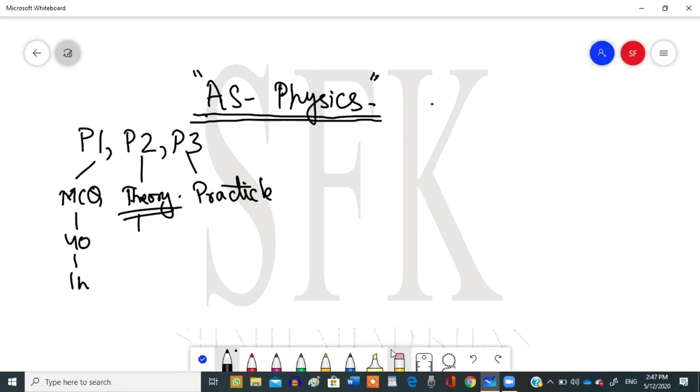I'm assuming you guys know what this is, right? You guys are familiar with all this stuff. Yes, sir. Okay, now going on to the topic. And by the way, you guys also know that P2 has a greater weightage than both the other components, the P1 and the P3. And P1 and P3 have equal weightage. So let's get started.

So the topic that we are going to cover today is moments. I'm not starting from chapter 1. We will do chapter 1, but later on. I'm doing the better chapter today, because chapter 1 is pretty basic. We can do that anytime.

Moments now. By definition, what is moments? Moments is the turning effect of force. And this is something you've done in O-levels as well. The turning effect of force is called moments. And if the examiner asks you to define what a moment is, this is not enough for the definition. You have to define it mathematically.

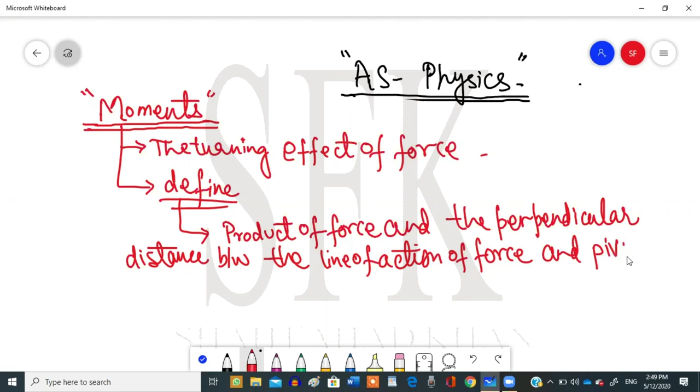You have to write it as the product of force and the perpendicular distance between the line of action of force and the pivot. I'll explain what this means.

Basically, if I have a log over here, a wooden piece of wood, a stick, and it's fixed from one end such that it is freely movable. It can rotate clockwise or anti-clockwise about this fixed pivot. This is called a pivot. Now if I apply a force over here at this particular point, this arrow, this dotted line, is representing the line of action of force, because this is the point where the force is acting.

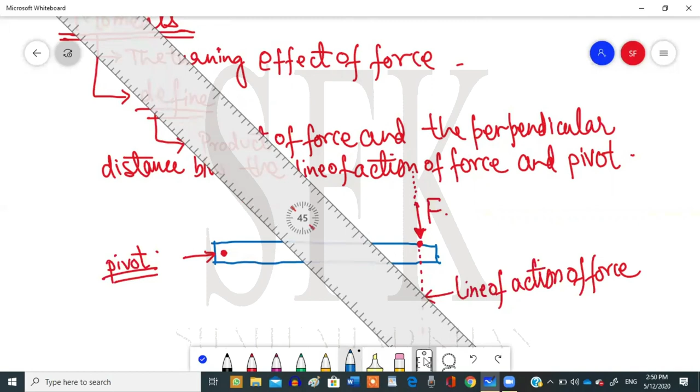And the perpendicular distance, perpendicular means at 90 degrees, right? So right perpendicular to this. If I were to draw a perpendicular line from over here all the way till this point, this angle is 90 degrees. And the green dotted distance between this point and this red line is the perpendicular distance from the pivot. If I take the product of this force and this distance, I'll get the moment of this force. So the moment of this force is the product of force and the perpendicular distance from the line of action of the force to the pivot.

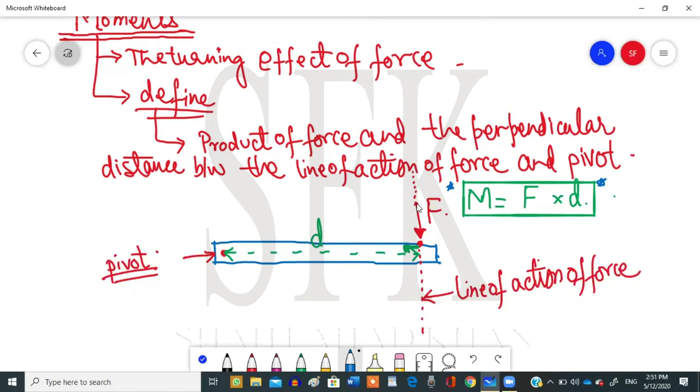This is how we can write down the definition of moments mathematically, and this is the formula that we'll use throughout this chapter. This is an important formula which I assume you guys already know from O-levels. This is the line of action of force. This is the perpendicular distance between the line of action of force and the pivot. This definition comes for approximately 2 marks. So if you are asked to define what moment is, the product of force and the perpendicular distance between the line of action of force and the pivot is called the moment. This is the definition you are supposed to write.

Moment is the turning effect of force, but this is not the complete definition for 2 marks. This is the definition you are supposed to write. This is a definition which is given in the marking schemes as well.

And now, what do you guys think? What will this force do? It will actually cause this log to move in the clockwise direction. It will cause it to rotate or to turn in the clockwise direction. So this turning effect of this force is actually the moment. And this is possible because there is a perpendicular distance between the force and the pivot.

Now, for example, if this perpendicular distance becomes 0, if this force acts right over here at the pivot, if the force acts at the pivot, if I take this force from here, pick it up and pass it through this pivot, if the line of action of force passes through the pivot, then in that condition, the value of this distance becomes 0, right?

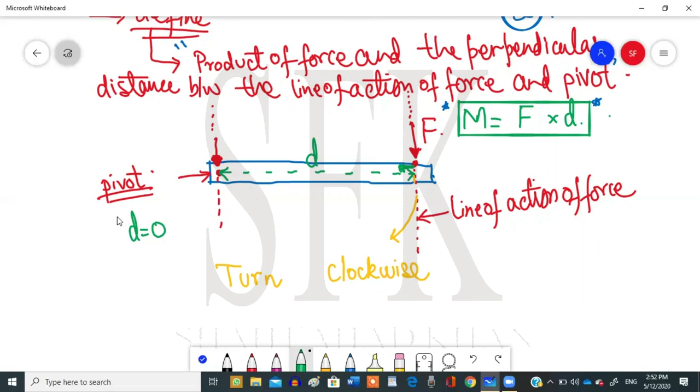And if the value of the distance becomes 0, then in that case, the turning effect or the moment will also become 0. So this is a general rule you should remember, that whenever a force passes through a pivot, let it be in this direction or in some other direction, for example, if a force is being applied from the right hand side towards the left hand side, but its line of action is still passing through this pivot, again, there is no perpendicular distance between the pivot and the line of action of force. I told you the perpendicular distance is what really matters for the moments, okay?

Or you could just remember it this way, that whenever a force passes through the pivot, its moment is 0. So the force passing through the pivot has 0 moment.

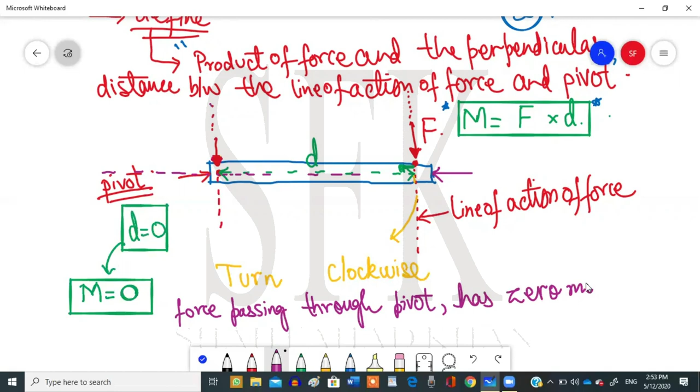Any questions so far? No. Guys? No. Okay, no question? All right, I'll move on.

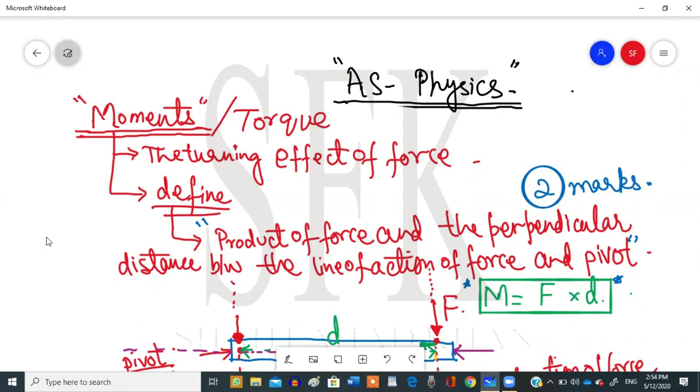Okay, and in our syllabus, we also refer to the moment as torque. Torque and moments in our syllabus are the same thing. So if the examiner asks you to calculate the torque, he's actually asking you to calculate the moment. No such difference over here.

Okay, if I have a uniform plank, uniform means a plank which has its center of gravity at exactly the geometrical center of that plank. For example, the length of this plank is 100 centimeters. So exactly at 50 centimeters, at exactly the middle, halfway from both the edges, will the weight of this plank act.

Such a plank is called a uniform plank. Or it can be a log, or any stick. As long as it is uniform, its weight will act from the center. So remember this, that its weight will always act from the center, because there are questions relating to uniform planks, and we're going to discuss them in a bit. So this is what uniform really means.

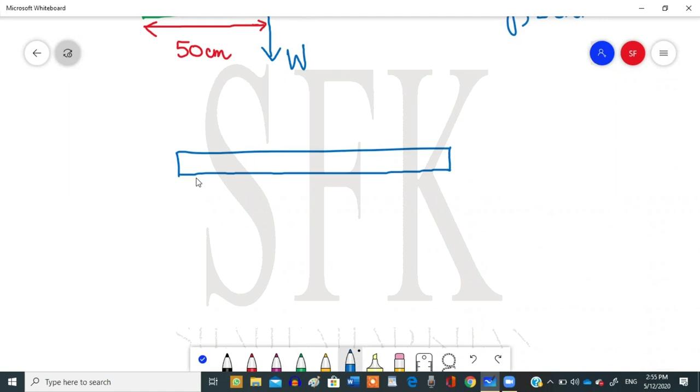Now, if I have this plank, and it's balanced by a pivot over here, and for example, this is an equilibrium. The plank is resting. It's not going down to the right hand side, nor to the left hand side. And the weight of the plank is, let's say, 50 newtons. If I ask you to label the weight of the plank, and there are several markings on this plank, going from 1 to 10.

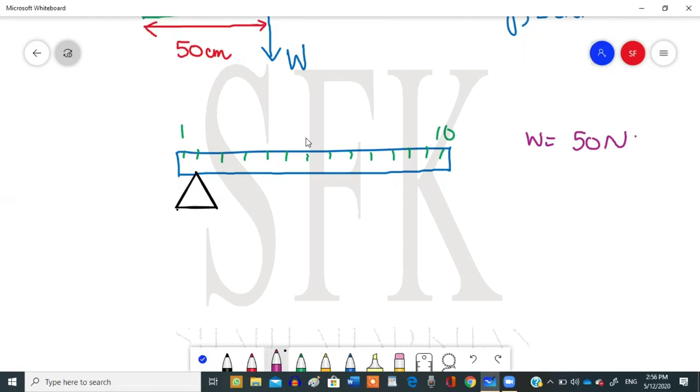So what do you think? Where will this 50 newton act? Any suggestions? 5 centimeters. 5. Yes, exactly, 5, acting downwards. What's center of gravity? We are about to define that in a bit, but I'll just tell you because you've asked.

Center of gravity or center of mass. In our syllabus, we don't distinguish between them. Actually, the definition of center of gravity is asked. Center of gravity is the point on a body at which the entire weight appears to act from.

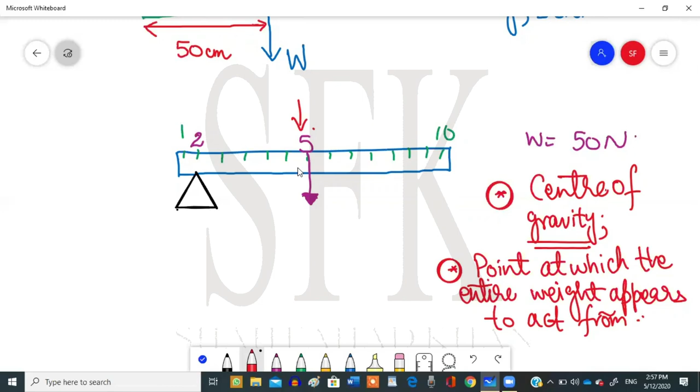So for example, if the entire weight of this plank is 50 newtons, and if its center of gravity is at exactly 5 units, I've not marked the units, but just assume this to be some imaginary unit. So if it is at exactly 5, then the entire weight appears to act from this point only. It will not act from any other point on this plank, on this ruler. Now if it's acting downwards, and this is the 2 mark over here, there is a force and there is a perpendicular distance between the pivot and the line of action of force. Just assume this to be very accurate: 5 minus 2 is 3, right?

The distance is 3. So the moment in this case is going to be in the clockwise direction, and the clockwise moment is going to be 50 times 3.

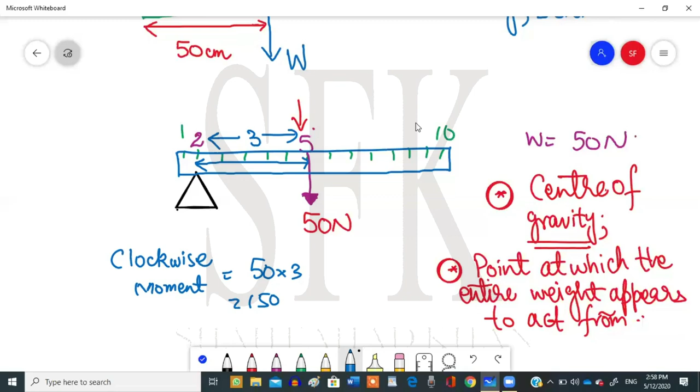150. And for example, if these markings were in meters, then it's going to be Newton meter. This is going to be its unit, Newton meter. Or if it were in centimeters, then it would have been Newton centimeters. But guys, in our syllabus, we deal with SI units. So you have to convert the centimeters to meters in order to calculate the answer in Newton meters. This is the final SI unit answer that you'll get. This was just an example.

Oh my God. Just a moment, guys. Okay. Now,

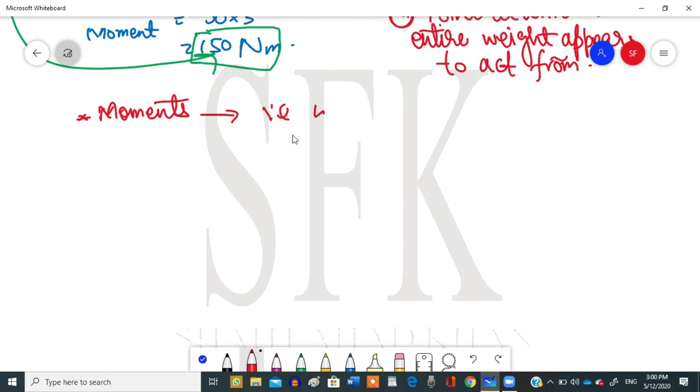Okay, let's move on. The next thing that we need to deal with, let me tell you something, like the clockwise moments. Moments are vectors. Do you guys know what vectors are from your O-levels knowledge? Moments are vector quantities. They have magnitude and direction. Yes, they have a magnitude and a direction. They are vector quantities. They have both magnitude and direction. This is what a vector is.

Yes. There are 2 possible directions for any moment. We have clockwise moments, and we have anti-clockwise moments or counterclockwise moments. The clockwise moments act in the direction of a clock, like this, from the right to downwards. This is a clockwise direction, and the anti-clockwise or the counterclockwise will act in the opposite direction to the clockwise moment.

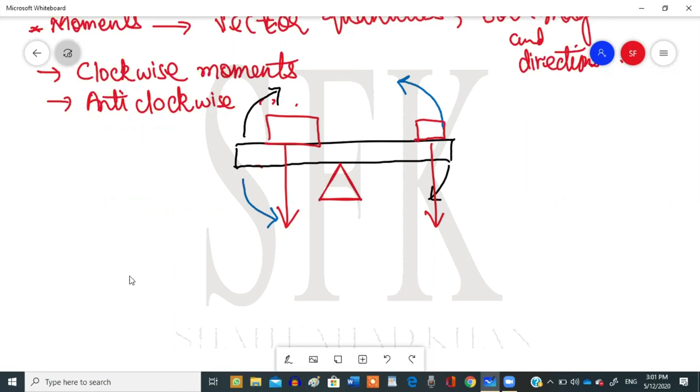And for example, if this is your pivot and I place a mass over here, its weight is going to act downwards and it will produce a clockwise moment. And if I were to place a weight somewhere over here, its weight will act downwards and it will produce a counterclockwise moment. So this is the difference between clockwise and counterclockwise directions of the 2 moments.

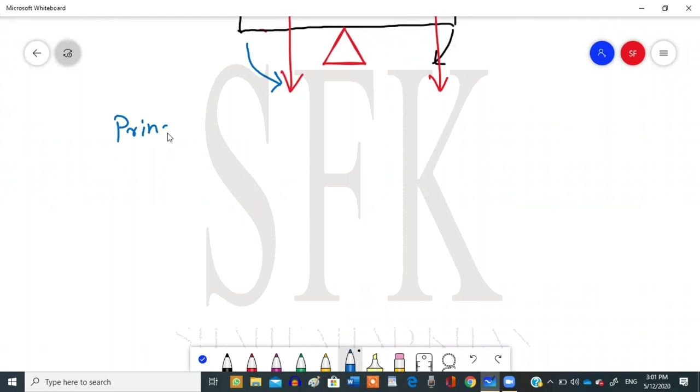Now, the next important part of this chapter is principles of moments. This is a high yield topic, principles of moments, and has been tested several times. In fact, almost every question of moments includes the principles of moments in it. This is something you've done in O-levels as well. This is just a quick recap of what you've already done in O-levels. The thing that's new in here is that principles of moments is the second condition of equilibrium. I'll tell you what the first condition is in a bit.

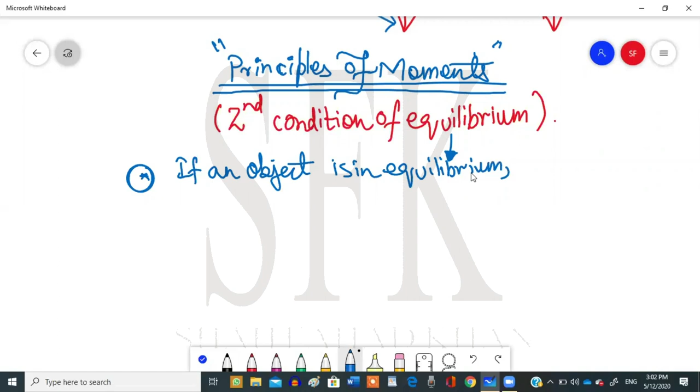Okay guys, so first of all, what is equilibrium? Anything is in equilibrium if it fulfills the two conditions. Now it will be clear just in a bit. The statement of the principle of moments says that if an object is in equilibrium, the sum of clockwise moments is equal to the sum of counterclockwise or anti-clockwise moments.

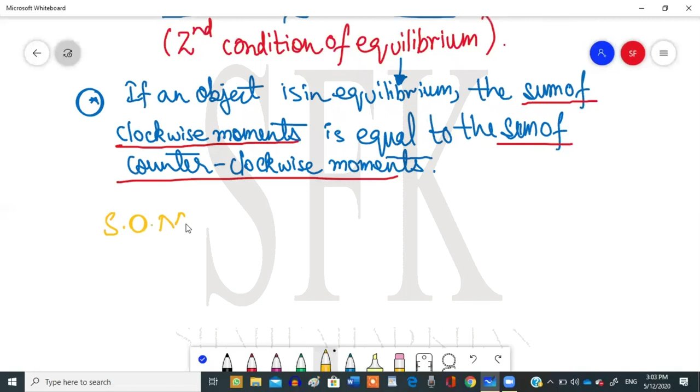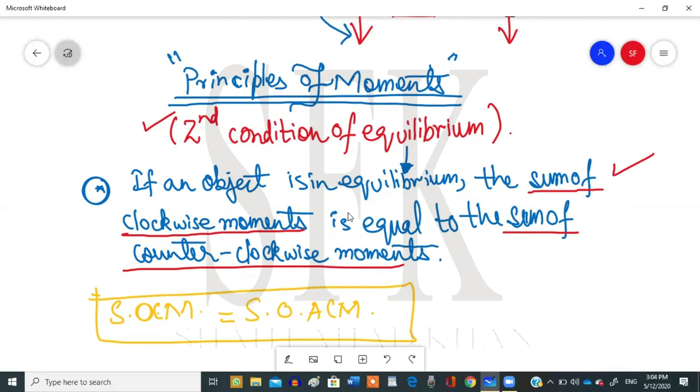So guys, the important point over here is that I've used the term sum of. All the moments which are acting in the clockwise direction or all the moments which are acting in the counterclockwise direction, if you have to place an object in equilibrium, they must balance each other out. Mathematically it can be written as sum of clockwise moments is equal to the sum of anti-clockwise moments. If a system obeys this condition, then it is obeying the second condition of equilibrium. But we cannot be certain whether that object is in equilibrium or not unless it also fulfills the first condition of equilibrium. We are going to talk about the first condition in a bit. First, let's finish off the second condition of equilibrium.

Now, for example, if I have a log placed on top of a pivot, and I have two masses, one to the left and the other to the right. The mass to the right has a weight of, let's say, 50 newtons, and its distance from the pivot is, let's say, 2 meters. And the mass on the left-hand side is at a distance of, let's say, 5 meters, and its weight is, let's say, 20 newtons. And I claim that this plank is in equilibrium. So to check whether it's in equilibrium or not, what are we going to do? We are going to calculate the clockwise moments and the anti-clockwise moments and see if they are equal. Then this plank is surely in equilibrium.

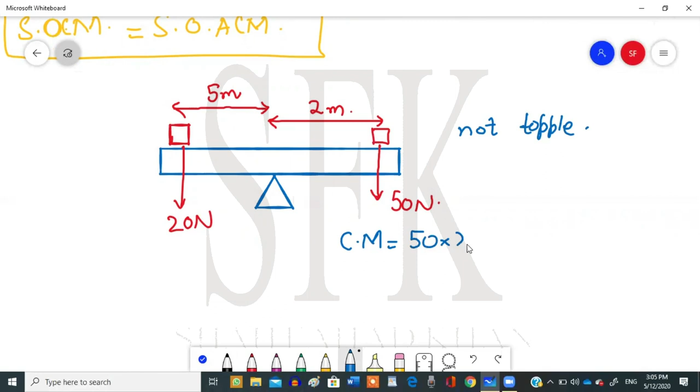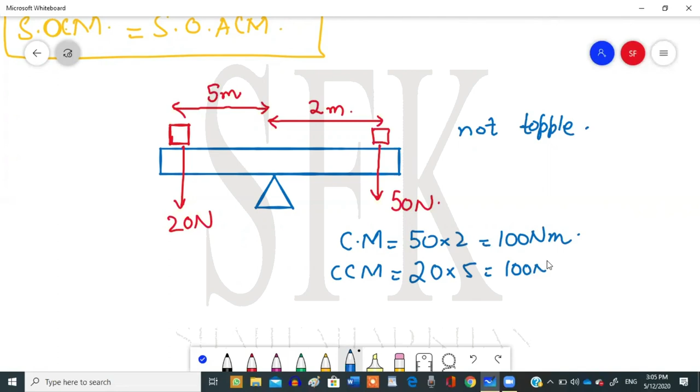It will not topple. It will not move in the clockwise direction, nor will it move in the anti-clockwise direction. So let's calculate the clockwise moment first. It's 50 into 2, 100 Newton meters, and the counterclockwise moment is 20 into 5. It's in equilibrium. It's also 100 Newton meters. And yes, the second condition of equilibrium has been fulfilled. And this log is in equilibrium and it will not topple.

Now, if I place another mass of, let's say, 10 newtons at a distance of 2 meters, and if I ask you where I should place a mass of, let's say, 30 newtons, okay, let's say this green block over here represents a 30 Newton mass. Now, to keep this log in equilibrium, where should I place the 30 Newton mass? This can easily be calculated by using the principles of moments.

Okay, first of all, for equilibrium, you know that the sum of clockwise moments and the sum of anti-clockwise moments must be equal. Now, to calculate the sum of clockwise moments, what are you going to do? First, identify the forces which are producing a clockwise moment. Is the 50 Newton producing a clockwise moment? Yes. Is the 30 Newton also producing a clockwise moment? It is, right? Yes. And what about the 10 and 20? No, they are not. They are producing counterclockwise or anti-clockwise moments.

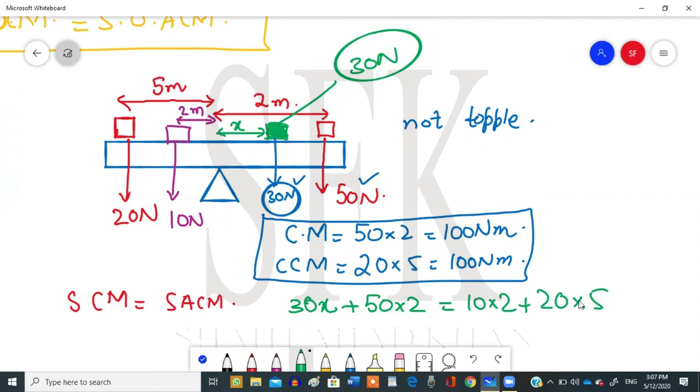Okay, so the sum of clockwise moments is going to be the moments produced by these two forces. So 30 multiplied by some unknown distance which we need to calculate, x, we make distance the subject. 30 into x plus 50 multiplied by 2, which is equal to 10 into 2 plus 20 into 5. All right, so the sum of clockwise and sum of anti-clockwise moments are equal. Now just calculate the value of x and you'll get the distance for the moment. Right, do you have the answer to it?

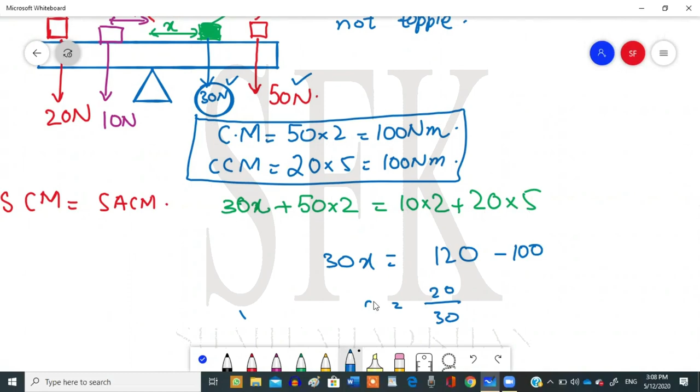120 minus 100 equals 30x. Sorry, what's the answer? Isn't it 2 upon 3? Yeah, it's 2 upon 3 meters. Okay, so we have to place a 30 Newton block at a distance of 0.67 meters or 2 upon 3 meters to the right. So this was the second condition of equilibrium, or the principles of moments. Any questions so far in principles of moments?

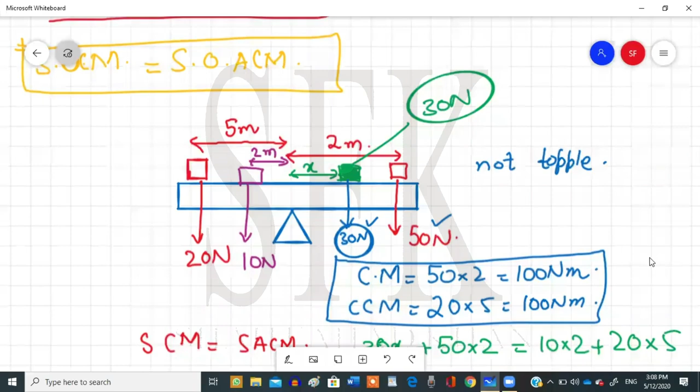Bilal, Khalid, anyone? No, all right. So now the past papers are loaded with example questions which apply the principles of moments. Okay, and this is the basic concept behind it. Nothing new, exactly what you've been doing since O levels.

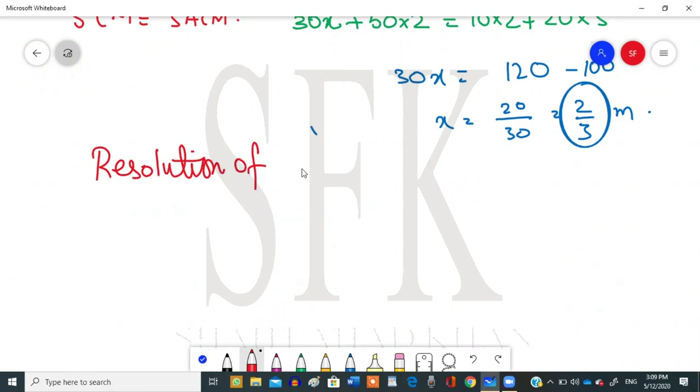But now let's do something that's new. You know what resolution of vectors is? Resolution of vectors. Yes, sir. You do? Okay, cool. That makes it easier. But I'll explain it anyway. Okay, resolution of vectors. If I have just one vector acting in any random direction, always remember that in our syllabus, we are dealing with two-dimensional vectors.

Two-dimensional vectors are those vectors which have two perpendicular components. One acts in the direction parallel to the y-axis, and the other acts in the direction parallel to the x-axis. The component that acts parallel to the x-axis is known as the x component, and the component that acts parallel to the y-axis is known as the y component of the vector.

Now, for example, if this angle is theta and this vector that acts is F, and if I apply trigonometry over here, can I calculate the lengths? Assume this to be a right angle triangle. Okay, wait, let me draw it a bit more clearly. The x component acts parallel to the x-axis. This is one component of the vector. And the y component acts perpendicularly to the x component, because you know that the x and y axes are perpendicular to one another, at 90 degrees. This is the y component, this is the x component, and it has a 90-degree angle.

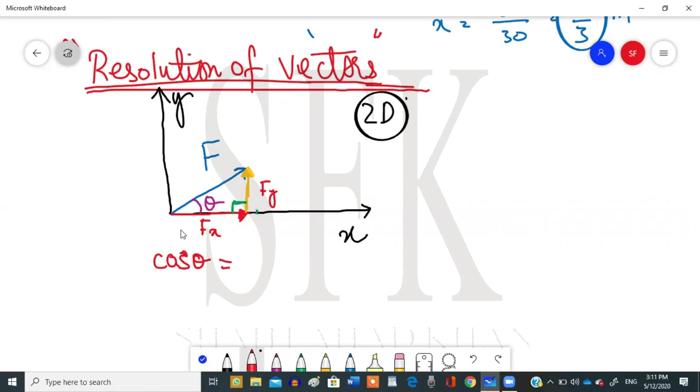Now let's apply trigonometry to get the values of these components. If I were to calculate the value of this x component, the red component, can I apply cos of theta? I'll call this Fx and I'll call this Fy. So cos of theta is going to be the adjacent side divided by the hypotenuse. And so now if we make Fx the subject, it becomes F cos theta, right?

The shortcut is that always, guys, remember that the side which is adjacent to the angle along which the force is acting, it's always the cos of that angle times that force, okay? F cos theta. And if you talk about the y component, it's gonna be F sine theta, okay? Applying the same trigonometric ratio, you can apply sine theta on it. Sine theta is gonna be Fy upon F, and so Fy is gonna be F sine of theta. So the y component is gonna be F sine theta, and the x component is F cos theta, okay?

And if I were to apply Pythagoras theorem over here, the F square is gonna be the sum of F sine theta squared plus F cos of theta squared. Right? This is Pythagoras theorem. The square of the hypotenuse equals the square of the base and the height.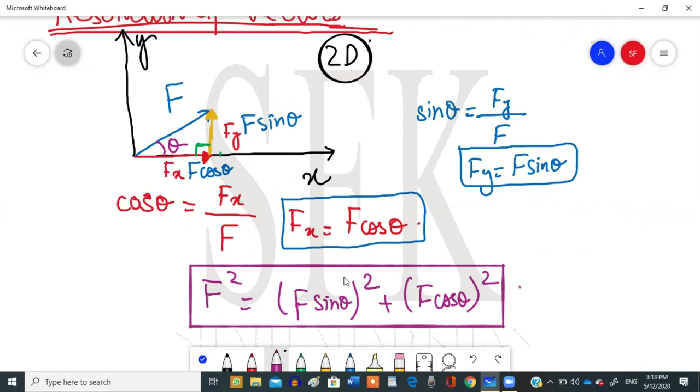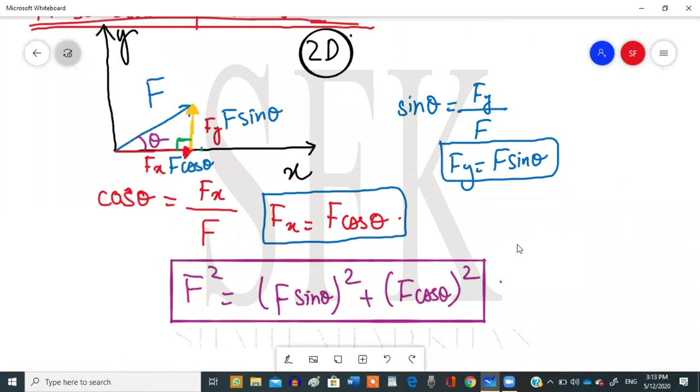Well, we don't need to use this formula a lot. Well, we do actually need to use this, but there is no specific question in which the examiner asks you to calculate the force using this formula, but this is where you need to figure it out, and this is what you'll get into practice once you start doing the past papers, okay? Once we get to the past papers, we'll get into the practice of solving using that formula as well. All right, so this was all about resolution of vectors.

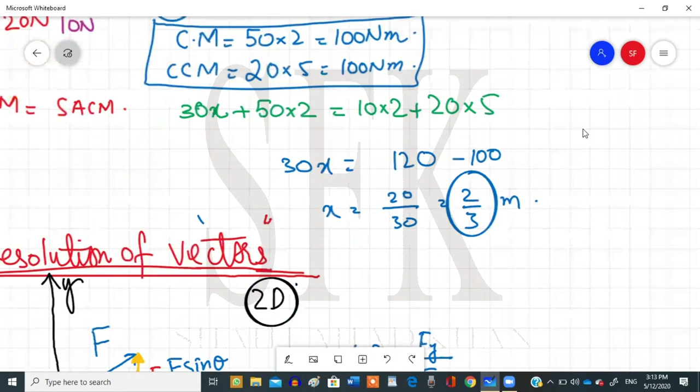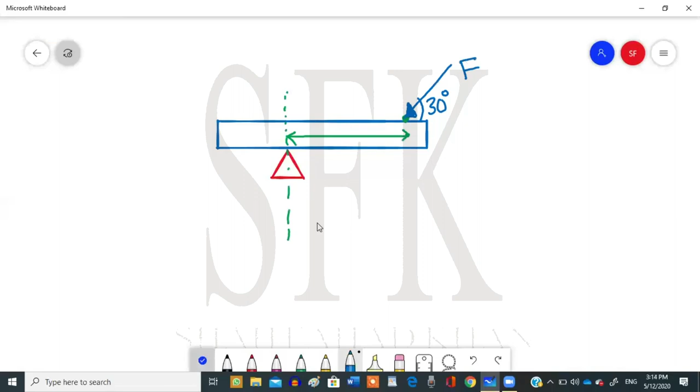Now, we are going to use this resolution of vectors over here in moments, okay? Now, how to use it over here? It's pretty simple. If I have a plank again, a horizontal plank over here, and now it's pivoted somewhere over here, and let's say this time a force acts at a certain angle. It acts at a particular point, for example, over here at this point, at an angle of, let's say, 30 degrees. It's not acting right perpendicularly, but it's acting at an angle of 30 degrees, right? And let's say the value of force is F, and this distance is small d.

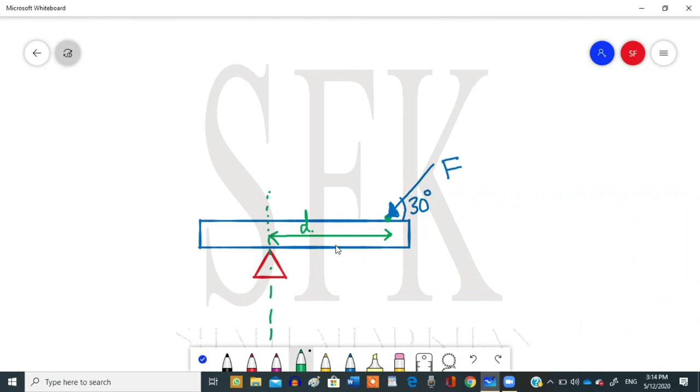Now, how to calculate the moment in this case? Well, guys, I told you that moment is the product of force and the perpendicular distance, right? So this means now in this case, the distance is not perpendicular. It's at an angle other than 90 degrees, it's at 30 degrees. So we need to calculate a component of force which is perpendicular to this distance. If I were to split this force into two components, this is going to be the horizontal component, right? And if I take another component perpendicular to the horizontal component, it's going to be the vertical component. Now, this vertical component, when multiplied with this distance, will give me the moment of this force, rather than this entire force being multiplied with this distance, because this component is acting perpendicularly to the distance.

Now let's calculate the value. First of all, guys, if this angle is 30 degrees, so I can say that this angle is also 30 degrees, all right? Alternate angles. Any confusion over here? No, sir. All right. If this is 30 degrees and the value of the force is F, so what's gonna be the perpendicular component? It's gonna be F sine of theta. Now, if I were to calculate the moment over here, so the moment is gonna be F sine of theta multiplied by this distance, d. So this is the case when the force is not acting perpendicularly, but is acting at an angle. So you take that component of the force which acts perpendicularly.

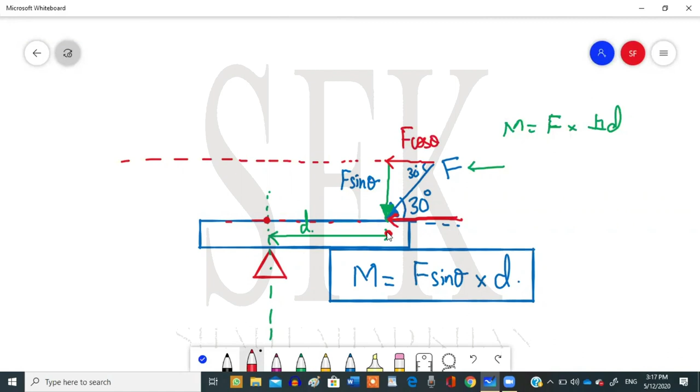Now, someone might ask that why are we ignoring the other component? Why are we ignoring the F cos theta component? Well, we are ignoring it because I can take this component acting over here, or I can consider this component acting over here, right? Doesn't matter as long as it's acting at the same point. So if I were to act it over here, then in that case there is no perpendicular distance. For example, if this is the point where the pivot is placed, then the perpendicular distance is going to be 0. Well, let me rephrase my words just a moment. Now, for example, if this is the point, let me make the diagram a bit better.

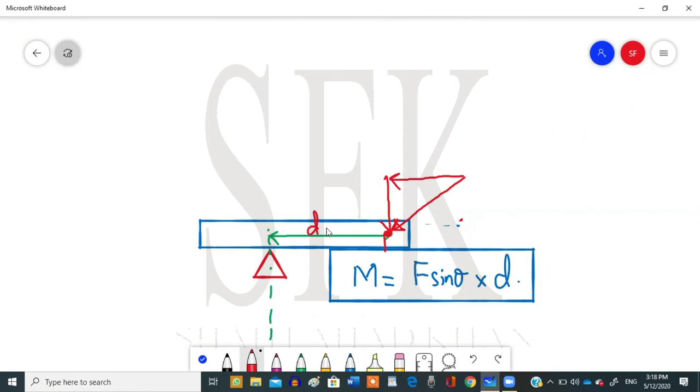The force actually is not acting at this top, but it is passing through this point over here, or through any point over here. Now in this case only the perpendicular component is taken, whereas the other component is parallel to the distance. F cos theta is parallel to the perpendicular distance, so the angle between the perpendicular distance and F cos theta is 0. So F cos theta is ignored because it will have a zero moment.

Or you could just assume it to be passing through the pivot. If this is the pivot over here, and you ignore the triangle, then this F cos theta is actually passing through this pivot.

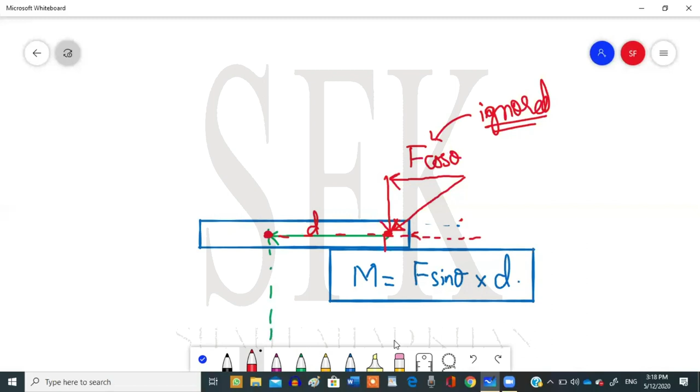Let's look at it from another angle. If this is the pivot, the freely moving pivot, and our force acts over here at this point at an angle of 30 degrees, and the distance between the pivot and the line of action of force is this d, then we have to take that component of force which is perpendicular to this d. If we split it into a horizontal component and a vertical component, then the product of the vertical component and this distance will give you the moment.

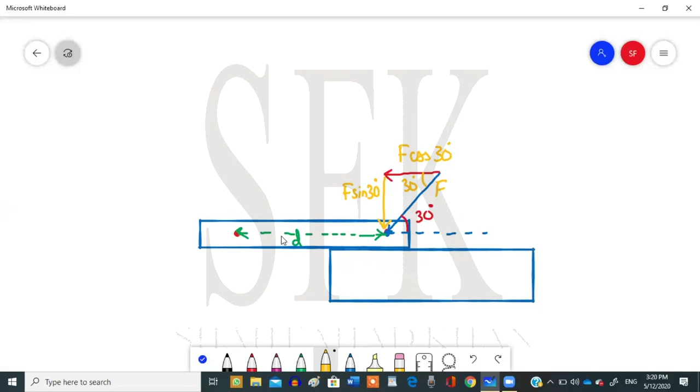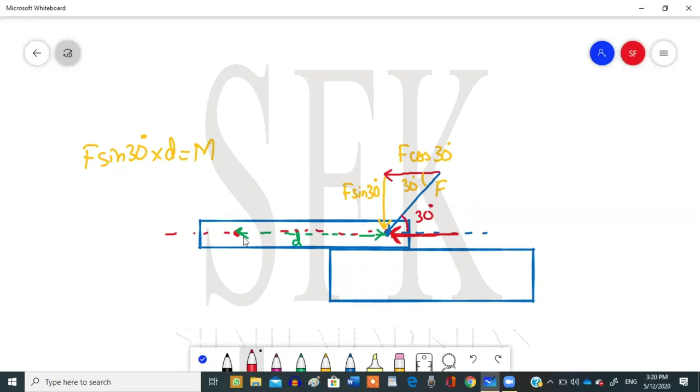This is 30 degrees and that's the force. This is F sine of 30. This is F cos of 30. This F sine of 30, when multiplied with d, will give you the moment, whereas F cos of 30 is acting over here. We can translate this vector over here. If we extend the line of action of this force, it passes through the pivot. And I told you earlier that whenever a force passes through the pivot, its moment is going to be 0. Yes, its moment is 0.

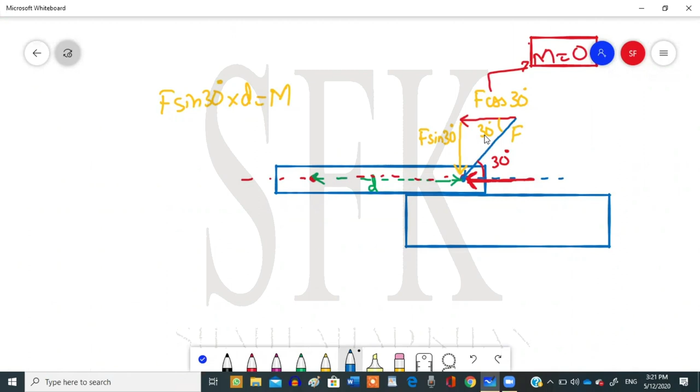Any questions so far on resolution of forces? No, sir. Right? This was a new concept, relatively new for you guys. So this is pretty much the first half of the chapter, and guys, you can even generalize it.

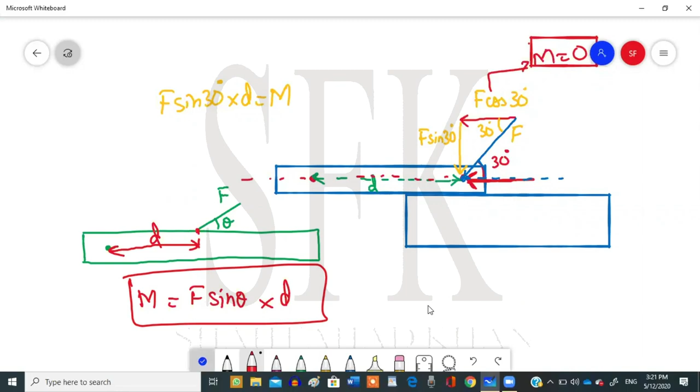If this is a plank over here, and this is the pivot, and you know the angle between the force and the plank, you could just take F sine of that angle multiplied by the distance between the pivot and the force, because it actually means the same thing. It is from this that we get the general formula. The concepts will get cleared even further once we get on to the past paper practice.

Now, moving forward, we've discussed the second condition of equilibrium. Now discussing the first condition of equilibrium. The first condition of equilibrium is also not new. It is with respect to forces.

Whenever the net force is zero, that object is in equilibrium. Or if you want to write it in words, an object is in equilibrium when the forces are balanced. Or you could say that when the sum of all forces is zero.

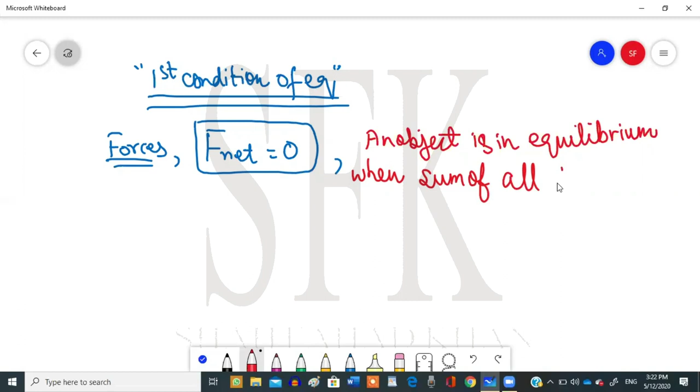All right. So for example, if I have another plank over here, and we have certain forces acting upwards and a certain force acting downwards. Let's say 50 Newtons is acting downwards, 20 Newtons is acting upwards, and 10 Newtons is also acting upwards. So is this plank in equilibrium or not? The forces which act in the upward direction are 30, forces acting in the downward direction are 50.

No. 50 minus 30 is 20. 20 Newtons is the resultant force, the net force downwards, which is not zero. So yes, it is not in equilibrium. Not in equilibrium because the net force is not zero.

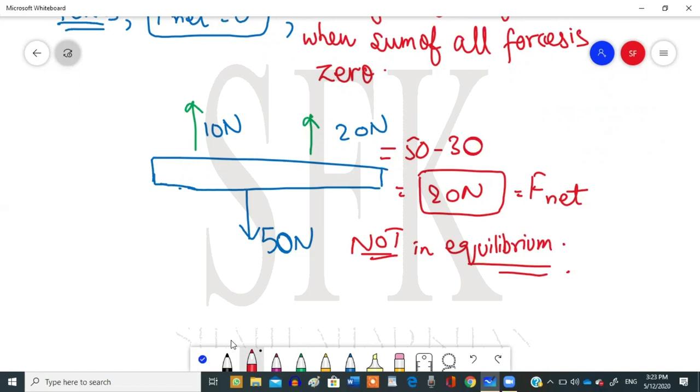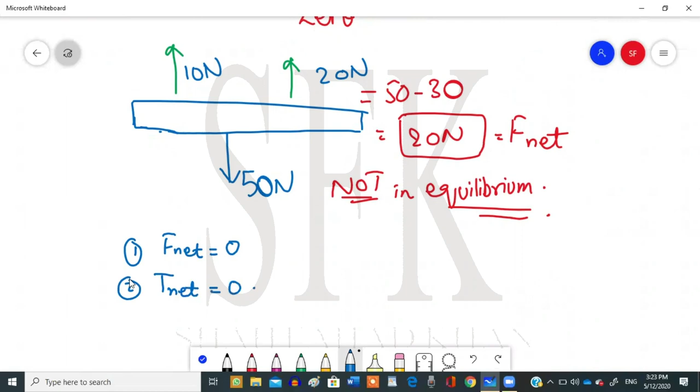So the two conditions of equilibrium. The first condition is that the net force must be zero. The second condition is that the net torque, or the net moment, must be zero. If both the conditions are satisfied, only in that condition is the object in equilibrium. If one is satisfied but the other is not, then the object is not in equilibrium. Okay, I'll give you an example of that as well now.

For example, if I have a plank over here, and a force acts right over here at 10 Newtons downwards, and a 10 Newton force acts upwards. Now guys, is this plank in equilibrium? Apply both the conditions that you've just seen. According to the first condition, the forces upwards and downwards are balanced. So balanced, zero. The first condition is satisfied.

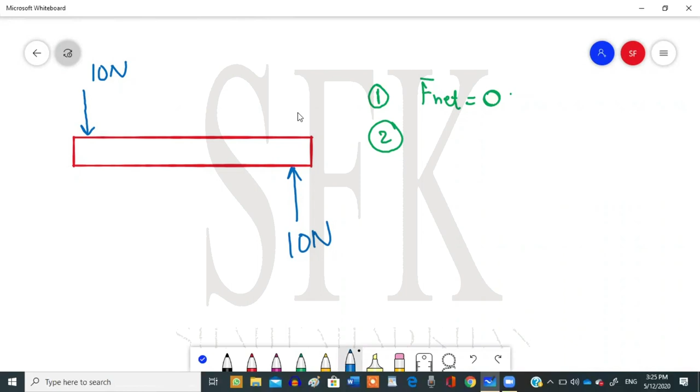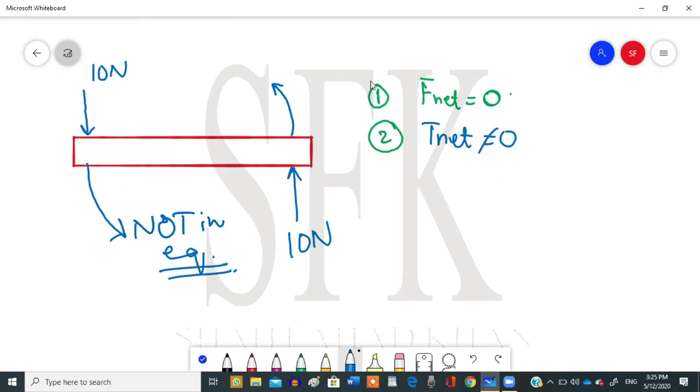What about the second condition? Will there be any torque produced in this plank? This force will cause a counterclockwise movement, and this force will also cause a counterclockwise movement, right? Both the forces are causing counterclockwise movement, so the net torque is not zero. So this object is not in equilibrium. All right, so this was one example.

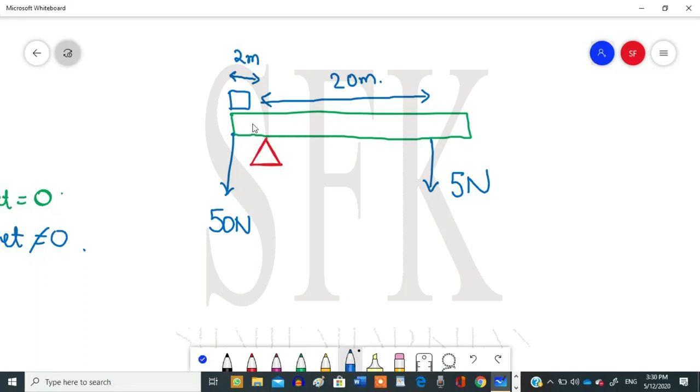Now let's do another example. There is a plank, and this is the pivot. Now a force acts downwards of, let's say, 5 Newtons, and this force is balanced by some other force over here, say 50 Newtons maybe, at a distance of maybe 2 meters. Just assuming these values. These are not the true values, of course. Let's just forget the numbers. I'll first give you a general example and then we'll go on to the numbers.

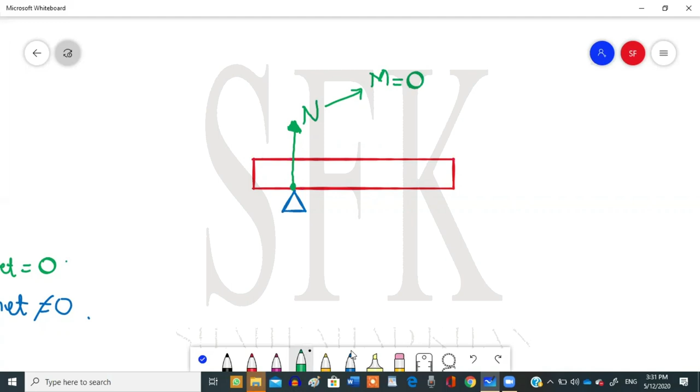Now this is a plank, and this is the pivot. Guys, is there any force between this pivot and this plank? Any force acting over here? You guys remember what normal reaction force was? The contact force, exactly. The normal reaction force, or the contact force, acts upwards. But remember, since it is passing through the pivot, will there be any moment? The moment is going to be zero.

And the plank has some weight, which acts downwards. And let's say I'm pulling this plank over here by some string, and that string has some tension in it. That string is attached to a pulley over here, and that pulley is attached to some weight, and that weight provides the tension. Now if I were to apply the first condition of equilibrium, the sum of all forces must be zero. Then which forces must equal each other out? The weight and the tension must be equal to each other.

But what about the normal reaction force? It's already zero? No, that's the tricky part. The moment is zero, but the force still is there. The force is non-zero. So the forces which act upwards, you're going to add them and equate them to the weight. If this condition is satisfied, the first condition of equilibrium is satisfied. This was a tricky part, and this is where most of the students mess up. They forget about this normal reaction force. Now is it clear? What's the role of the normal reaction force?

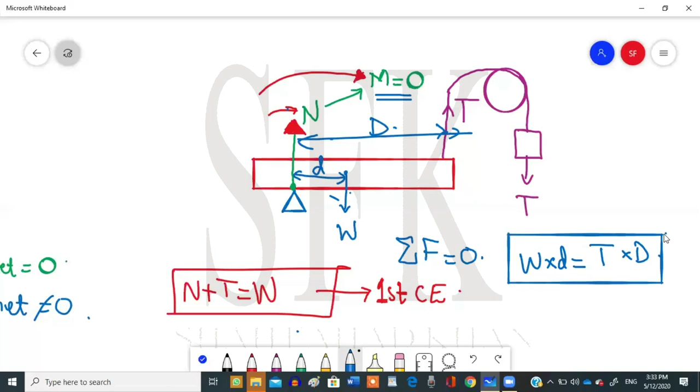Now what about the second condition of equilibrium? For the second condition, will we consider the normal reaction force? Correct, no, because the moment is zero. So we are going to take the clockwise moment of the weight and the anti-clockwise moment of the tension. If both of them are equal, in that case, it's satisfied. So for example, if this distance is small d and that distance is capital D, then the two moments are going to be: weight multiplied by small d must equal the tension multiplied by the capital D. So the second condition of equilibrium must also be satisfied this way.

All right, so now let's move on. Any question up till here? No, sir. No. Okay.

Now, guys, a special pair of forces called the couple forces, which produce a moment that's called torque of a couple. Okay, what is a couple? All right, guys, a couple is actually a pair of forces.

Now, if I have this plank over here, again, just a moment. Yes. All right. Okay, couple. Let me resume. Okay, it's resumed.

Now if I have a plank over here, and there are two forces. One acts at this end, and it's pivoted at the center. One force acts downward and has a magnitude of F. And the other force acts upwards, in the upward direction, and has the same magnitude F.

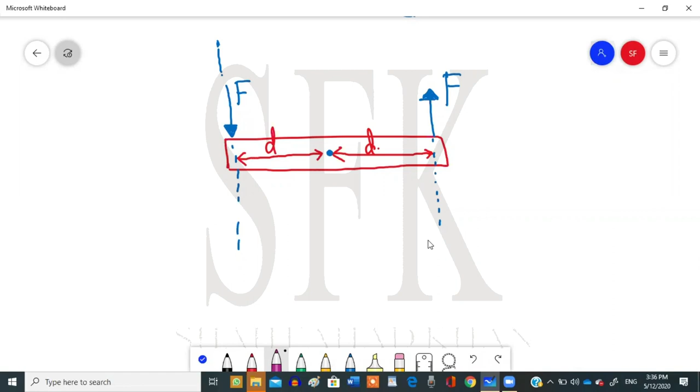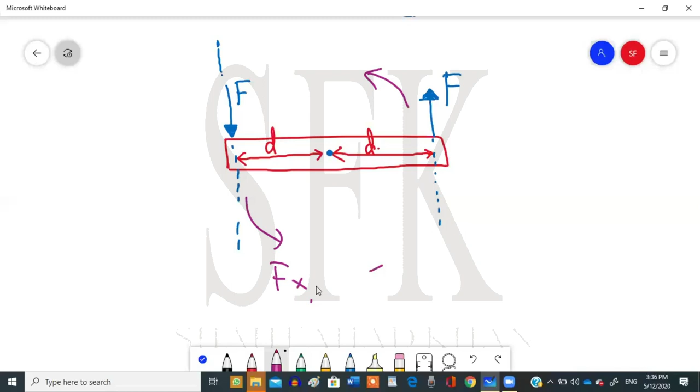Both of them are actually producing counterclockwise moments, right? This one is acting downwards, counterclockwise. This one is acting upward, again counterclockwise. So the moment due to this force is going to be force multiplied by d, plus force multiplied by d again, because both of them are acting in the same direction. The total torque is going to be 2Fd, twice of Fd, right? Yes.

Now such forces which have exactly the same magnitude, opposite directions, and act along different lines of action. I'm repeating what I just said. This is very important, guys. These are the three properties that must be present in these forces. Same magnitude, exactly opposite direction, and acting along different lines of action.

Sir, can you please explain the third part? The third point, acting along different lines of action of force. I'm going to explain all three again. Forces which have the same magnitude means F and F, their magnitudes are the same. Opposite directions, one is acting upward, other is acting downward.

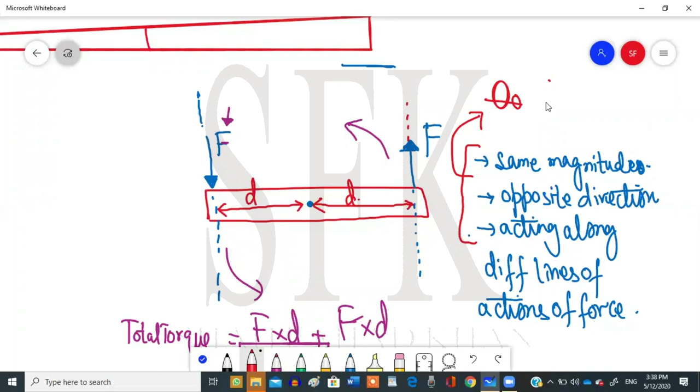They are called couple forces. And so they should be 180 degrees, right? Like both forces, they must be opposite to one another. Exactly opposite to one another. One acting downwards, other acting upwards. One acting to the left, other acting to the right. And they must have some perpendicular distance between them, not acting along the same line of action of force. This implies that they have some distance between them, right?

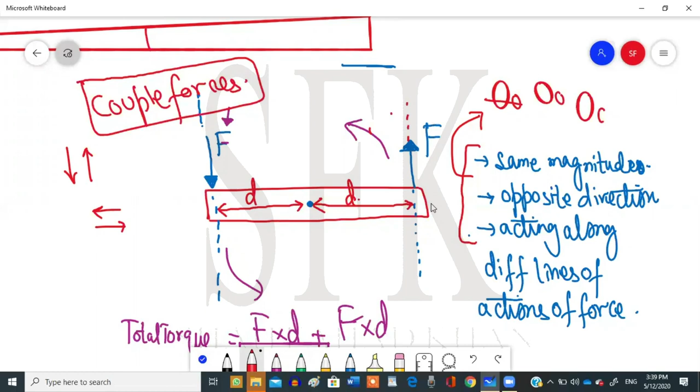Now, the direct formula for calculating the torque of a couple is taking the magnitude of one of these two forces, this F, multiplied by the perpendicular distance between these two forces. What's the perpendicular distance between these two forces? Is it 2d? Yes. d plus d. And what do you get? You get 2Fd. Is it exactly identical to the initial 2Fd which we calculated using the conventional method? They're the same, right? Yes. So this is how you could calculate the torque of a couple.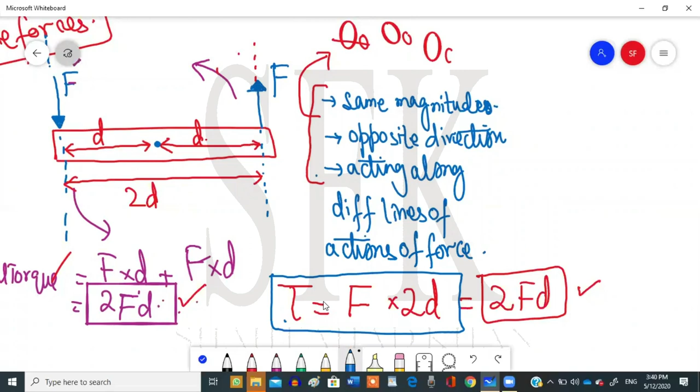Torque of a couple is found by just multiplying the magnitude of one of the two forces by the perpendicular distance between these two forces. Okay? And guys, the definition of a couple force and the definition of torque of a couple are asked in the past papers. So I'll write them down in words over here and you guys need to learn them.

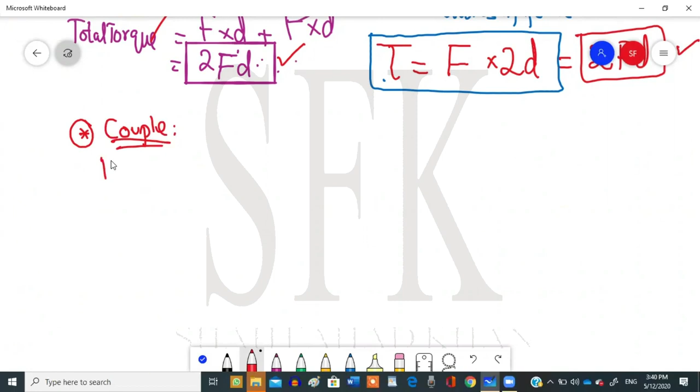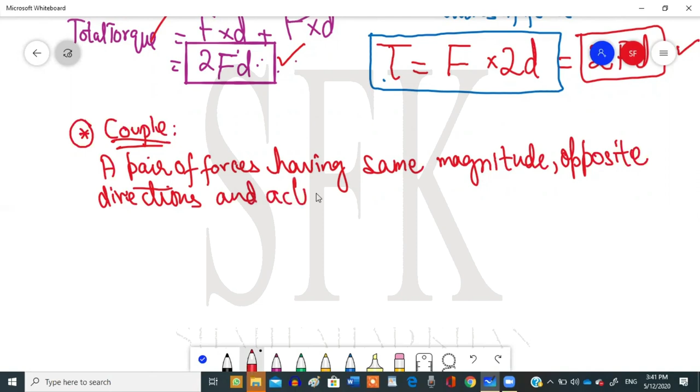Okay. First of all, what is a couple? You just need to add up all those 3 points. So a pair of forces with the same magnitude, opposite direction, and acting along different lines of action. These are called couple forces.

And the second definition that is usually asked in the past papers: define torque of a couple. This is pretty similar to the definition of a moment, okay? So the product of one of the couple forces, not both the forces, okay, just the magnitude of one couple force, not 2F, just F, and the perpendicular distance between the two forces, or between the lines of action of the two forces, okay.

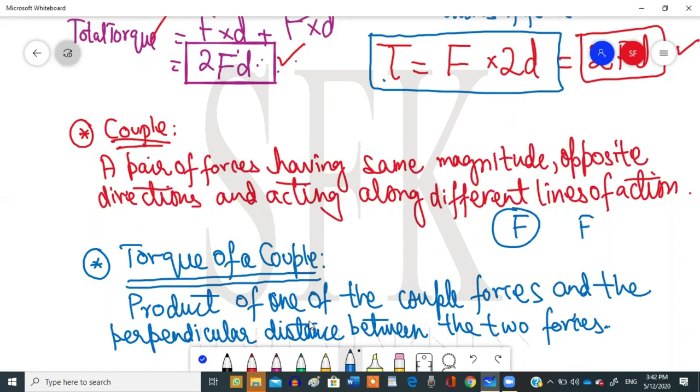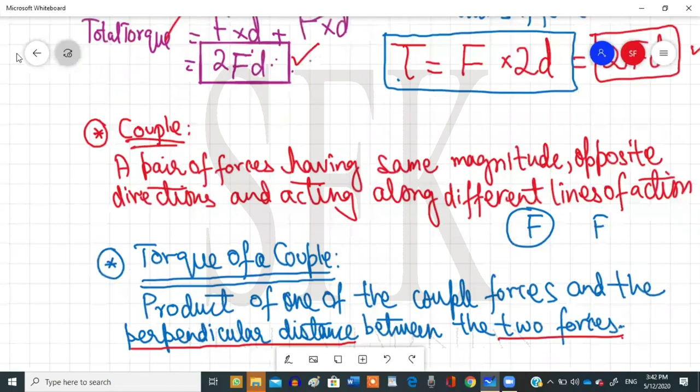This is not the perpendicular distance from the pivot, okay, remember that. This is the distinction between the two: this is the perpendicular distance between the two forces. Now guys, these are the two definitions which are asked for 2 marks or sometimes 3 marks as well, okay. And this is all about the torque of a couple and couple forces. Now let me ask you guys a question over here. Pretty simple though.

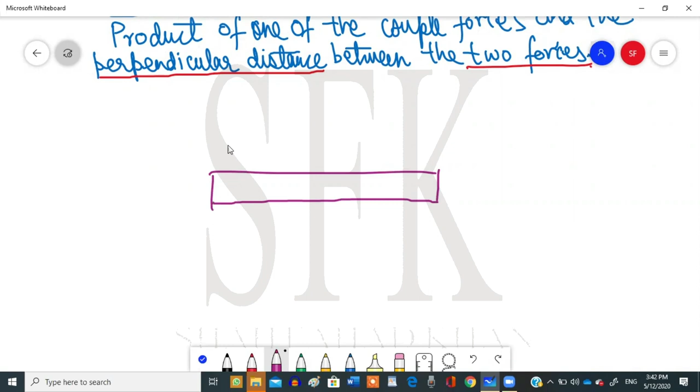Are couple forces in equilibrium? These are couple forces, right? Are they in equilibrium or not? Any suggestion? Do they satisfy the first condition of equilibrium? Yes, the forces are balanced. The net force is 0. What about the net torque? Do they have a torque or not? We defined the torque of a couple over here. Yes, they definitely have a torque. The torque is not 0. Net torque is not 0. So if the net torque is not 0, then again it's not in equilibrium.

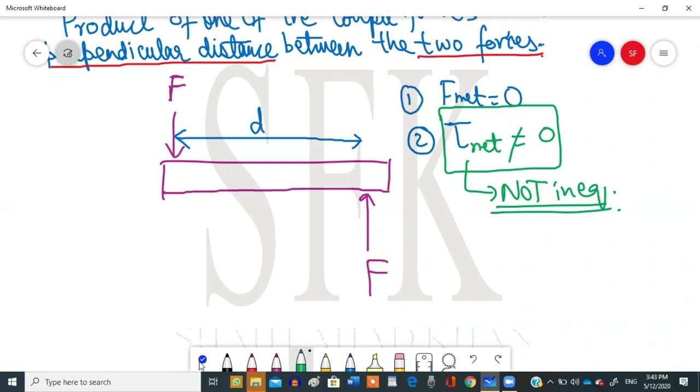And if these forces didn't act along different lines of action, but acted along the same line of action in the opposite direction, then what would happen? Will there be any moment generated then? What will happen to this distance? If I take the force from here, pick it up and place it over here in the opposite direction to the other force, what will happen to the value of this distance? Will it increase or decrease or become 0? Yes, it will become 0. And if it becomes 0, then these two forces are balanced out. The net torque will also become 0 in that case. Then these two forces are no longer couple forces.

Couple forces are only those forces that have a certain non-zero value of this D. The two forces acting in the opposite direction along the same line are not couple forces. So now the net torque is 0, the net force is 0. So now can I say that this object is in equilibrium? Yes, now it's perfectly in equilibrium.

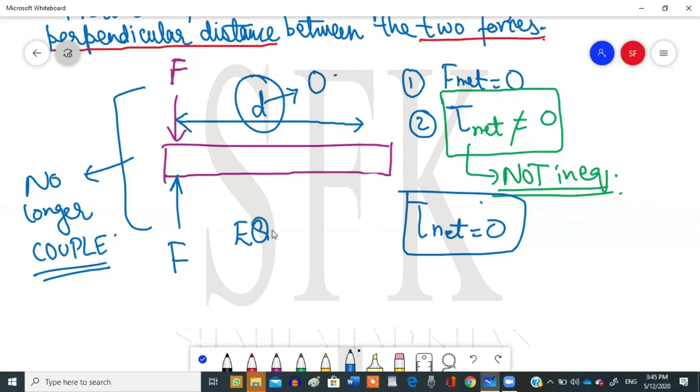Now coming towards center of gravity. I told you about the center of gravity in the beginning, I'll just go over it one more time. Center of gravity. Okay, this is actually an imaginary point. This is not an actual point. A point in a body where all the weight appears to act.

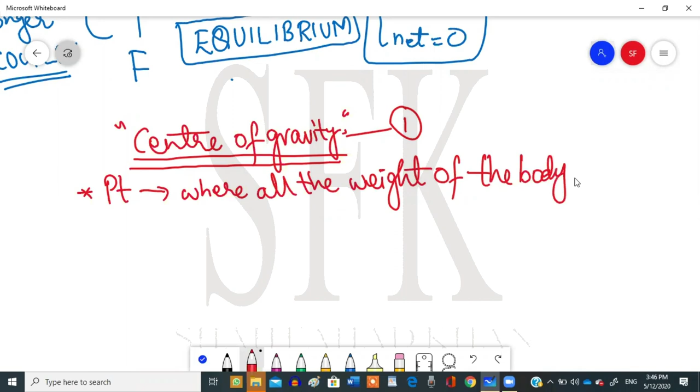And it has been asked in the past papers one or two times to define the center of gravity as well. So this is the simplest definition of center of gravity. And I think this is enough because the definition was 1 mark, I think. So the point on a body where all the weight of the body appears to act. It appears, okay? Appears to act.

And I told you in case of a uniform plank, it acts at exactly the geometrical center. Now, what about non-uniform masses? For example, if I have a mass like this, and it has a greater mass to the right and a lesser mass to the left, in this case, where will its weight act from?

So basically, center of gravity, as I told you, is the point where the weight acts from, or where the weight appears to act. The side which has the greater mass, the center of gravity shifts from the center to that side. So now you can take any random point over here, but it should be in this region only, and that point can be marked as the center of gravity. And this is the point from where the weight will now act in case of non-uniform bodies.

In case of non-uniform objects, the weight does not act from the geometrical center, but rather it tends to shift towards that side where the weight already appears to be in a greater quantity. And sometimes the examiner asks you to label the center of gravity, not accurately but just roughly. So this is how you're going to label it. Just label that point of that body which already has greater mass.

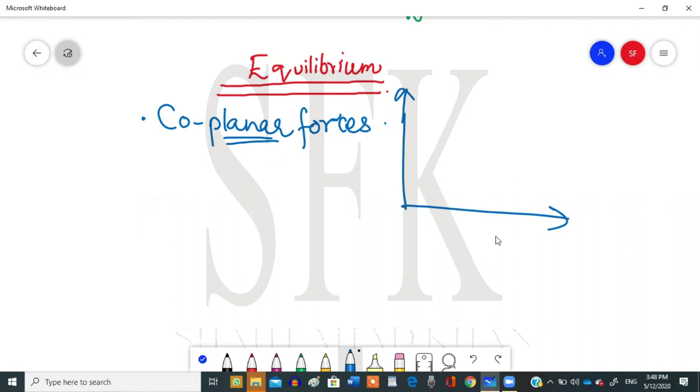Now, the last part of our discussion, a bit more about equilibrium and its forces. Actually, this is a bit of an extension of the first condition of equilibrium of forces. Now, if you know what coplanar forces are, coplanar forces are basically those forces which act along the same plane. So for example, if I have the XY plane, X and Y axis, this is an imaginary two-dimensional plane, and it's called the XY plane. So if two forces act along the same plane, they are called coplanar forces, if they act in the same XY plane.

Now, a bit about the triangle of forces and triangle of forces for equilibrium. I'm assuming you know from O-levels what the head-to-tail rule of vector addition was. I'll review it. Head-to-tail rule. If two forces are acting at a certain point, for example, one force acts over here in some random direction, and the other force acts in some other direction over here, and if I were to calculate the resultant of these two forces, how will I do that? Well, it's pretty simple. You just add them by head-to-tail rule.

You take the first vector, any of the two vectors is taken. On the head of that vector, you add the tail of the second vector, and then you draw out a resultant force which starts from the tail of the first vector and goes till the head of the second vector, and this is the resultant vector. This is what the head-to-tail rule was, which you have done since O-levels. Now this is called a vector triangle. For forces which are in equilibrium, a closed triangle is formed.

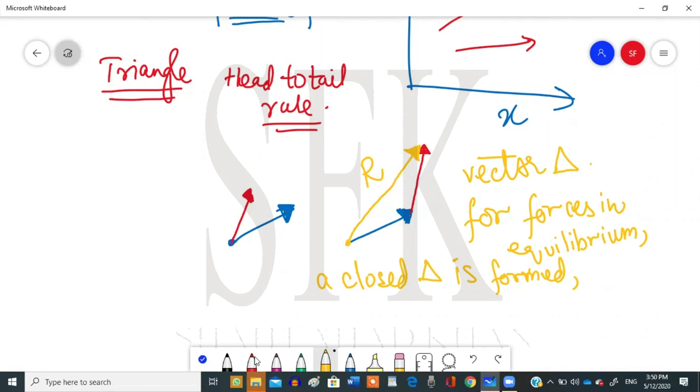In that closed triangle, all the forces are actually acting in the same direction. I'll explain what this means. In this case, we have a resultant, right? In case of equilibrium, there is a third force which acts in the opposite direction to the resultant. So if I were to place this force over here in place of the resultant, do we get a closed triangle in which all the forces are actually acting in the same direction? Yes, they are actually going in the same direction.

1, 2, and 3. Head to tail, head to tail, head to tail. They are actually following the same path. So whenever we get an equilibrium triangle like this, that triangle is always for a body in equilibrium. And for bodies not in equilibrium, a resultant exists.

Should I repeat this part, or did you get it? I got it, sir. So you can repeat it, please. All right, I'll repeat it.

Basically, if you have two forces, you add them by head to tail, right? If you add them by head to tail, you get a resultant like this. Now, if you consider this triangle over here, these two forces are acting in the same direction, but this force is not acting in the same direction. The resultant is not acting in the same direction, but rather it's acting in the different direction.

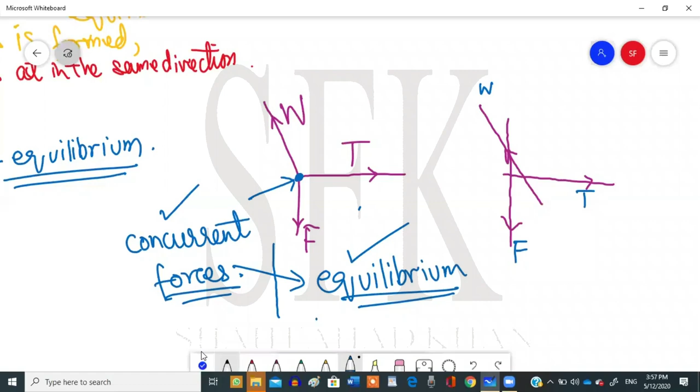So these are concurrent forces. And yes, this was the last part of the lecture. Okay, we are done.